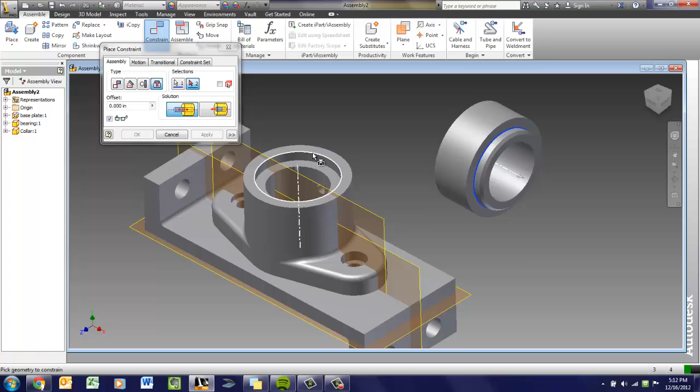Okay, so if we're looking at our drawings, we know that this part here has to fit within this internal space here. The best way to do that is actually to use the constraint, the insert constraint, to get this so that it goes in. Notice that when I'm doing the insert, we're dealing with center lines and some other part that connects. Okay, so what we're going to do is, I know that this inside edge needs to fit on this outside edge here. Goes around along the center line.

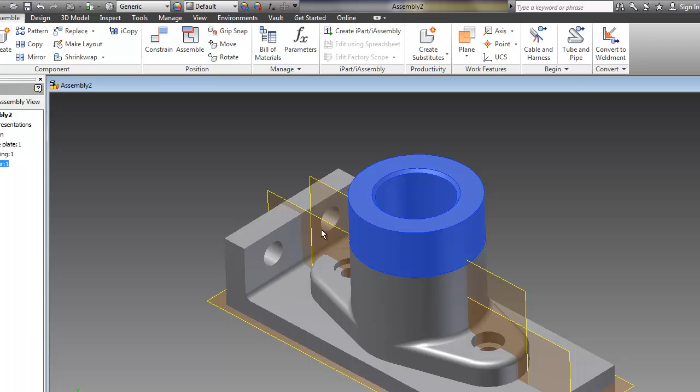Insert's great because as soon as I identify where it has to be, it finds its way into that place. Okay, we're using the opposed as well in this case, and I got to make sure that I actually apply that information. So as far as we're going here, that's great. Now if we were to look at how this thing can move right now, it's hard to tell, but it is actually moving. It is rotating along that axis around the circle.

Okay, if I go to degrees of freedom, you can see that there is a red line that goes up through on the axis of rotation, and it shows that it can spin around. Okay. The next part we need to place is the cap screws. I'm going to come in here, and I have to place my cap screws. And again, the beautiful part about this program is the fact that I only need to create one of these. And as you can see, I didn't place my threads all the way,

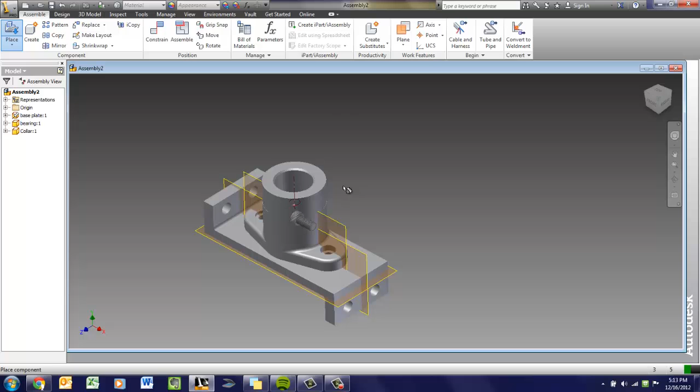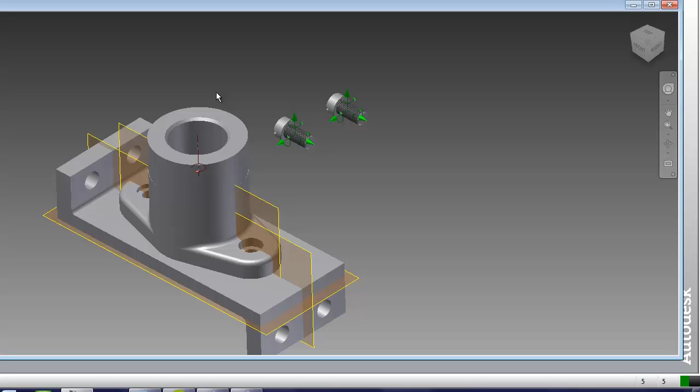but no matter. Okay, I'm going to place two of these, so I need one for either side, either one of these holes. So I place those two, and I'm going to show you how to place one of them. Okay, and I'll let you practice with the other, and then actually go back through this whole set of tutorials and do it on your own. Notice right now that I have lots of degrees of movement for these. There are at least 6 degrees of movement, right? These 3, and then the 3 in the opposite direction if I go all the way across.

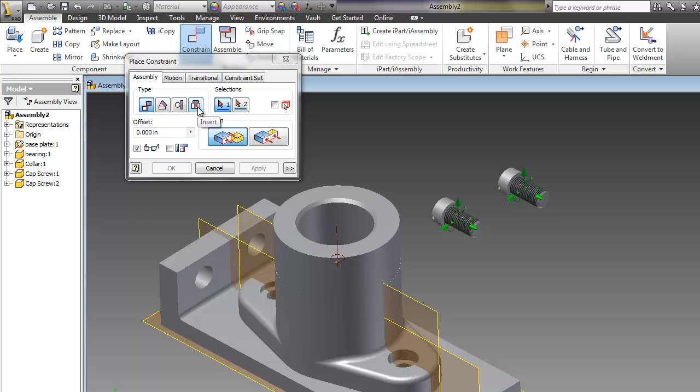So we're going to constrain this, and as we know, this part has to fit within this hole. Our cap screw must fit within this hole in the bearing. So I'm going to use insert again. I'm going to use opposed, and I'm going to identify what parts are touching what. So we know that this is going to sit, okay? That insert in that direction is going to sit within this piece here.

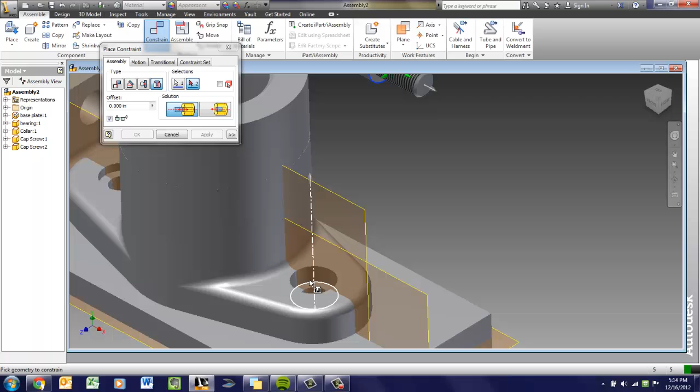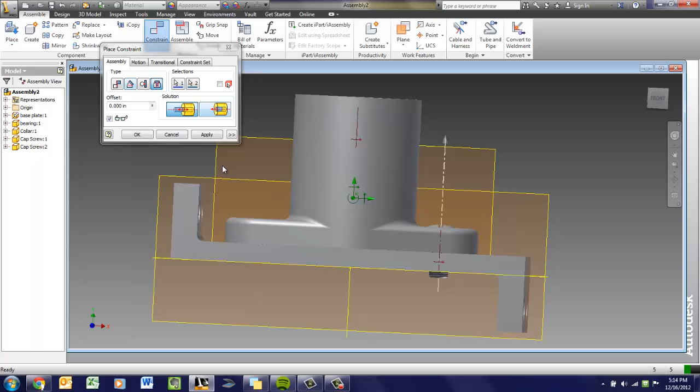So when I go in here, I have to make sure, and this is the tough part, making absolutely sure you're actually on the right part, because there's so many different edges and lines that you could click on, but making sure that those fit. And if I do it correctly, notice how it sits perfectly in that hole, exactly as I need it to be. And as everything is to tolerance, I can then see exactly how far my bolt would stick through given these specific amounts. Okay, so as I said, I'm not going to go any farther.

Go ahead and try that for the other side. Okay, always make sure to apply, and if you have any questions, please make sure you ask. Good luck, and the more you play with this, practice, the better.